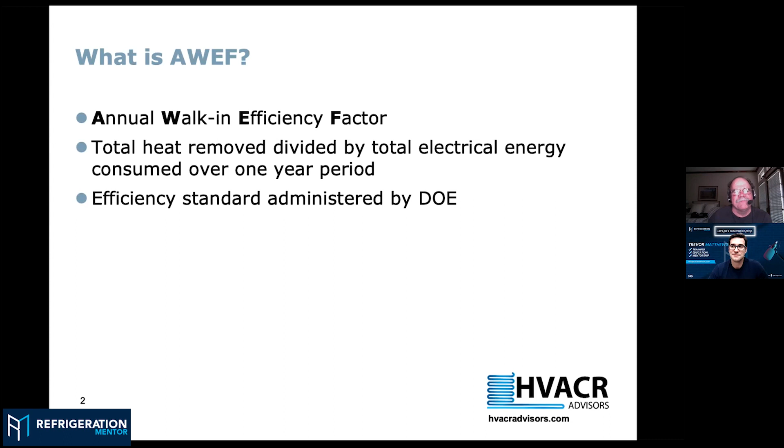And they got around to looking at walk-in cooler equipment systems fairly recently. They've been doing residential air conditioning heat pumps for quite some time, and they've established a standard for efficiency for these walk-in cooler and freezer equipment.

And just to kind of give you an idea of the history, the original procedure was published in 2014. It was supposed to go into effect in 2017, but there were problems with the test. Yeah, there was problems. In other words, the manufacturers said, "Hey, this doesn't make sense." So they got together, worked it out, and they had it figured out by 2020. So as of about 3 years ago, walk-in coolers and almost 3 years ago, walk-in freezers now have to comply with the AWEF requirements.

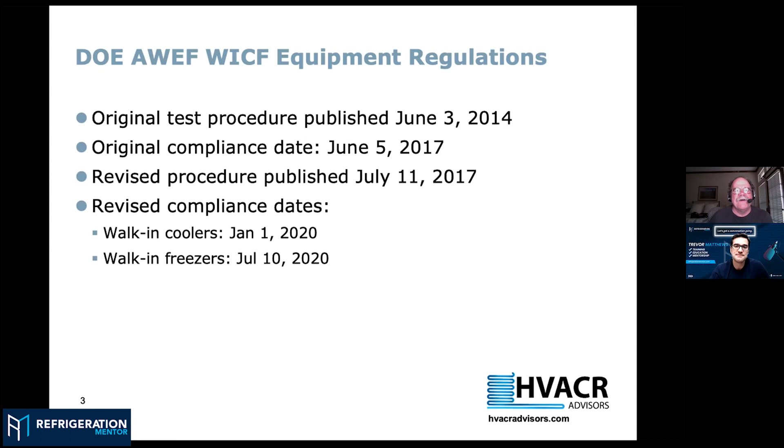Now, if you want to see the test procedure, it's available free online at the AHRI website. However, I might suggest to you that you go to my site under the cold topics section. You can read the article. I wrote an article, tried to make it as concise and as clear as possible what they're trying to do with the AWEF standard.

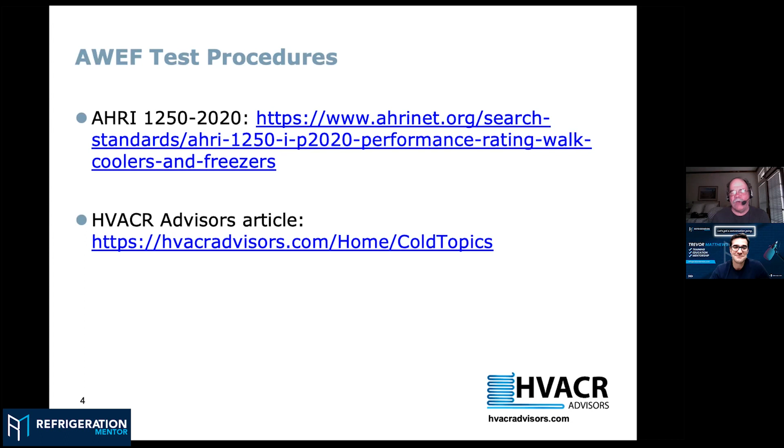Yeah, I've done a ton of training on them when I was working at Emerson, and it was hard just for me to figure it out. I had people walking me through it, and I was still confused for the longest time, because there was that period from 2015, 2016, I didn't have a clue, but around 2018, 2019, I finally was clicking in on it because there is a lot to it.

Yeah, in my article, I actually show this table. There are actual AWEF efficiencies. They are in BTUs per watt hour, which is the same for SEER, but obviously the tests are different. And they have an AWEF requirement for both indoor and outdoor condensing units, and they have a separate one for unit coolers. In the field, you're normally matching up a condensing unit with a unit cooler. Most of them are not sold as a system.

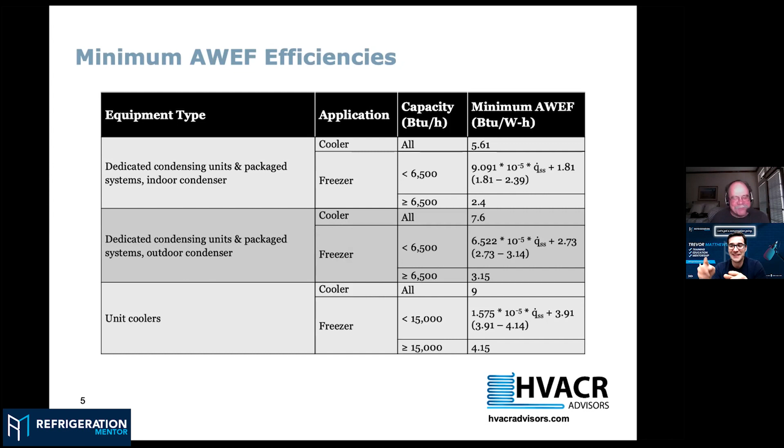So it was necessary, and that was one of the early problems, that the DOE had to figure out a way to rate just a condensing unit without a unit cooler, and they worked that out. That was a head scratcher. And the funny part is, when this was coming in, the refrigerant regulations were coming in at the same time. Oh, absolutely. It was kind of a double whammy, but I actually wasn't even planning on getting into that subject here.

We don't have to. But there are exceptions to the AWEF requirements. In other words, it is not necessary to install AWEF compliant equipment for certain systems. Any walk-in that has a floor space 3,000 square foot or greater, you're not required to put AWEF compliant equipment. The theory being that the DOE figured they're going to be engineered systems anyway. So they were only interested in the smaller walk-ins with their energy efficiencies.

Any compressor system with a remote condenser, there's no AWEF requirement at all. Water-cooled condensing units, no. Interestingly enough, if you've got specialized systems for medical or scientific applications, there's no AWEF requirements either. Any multiplex systems, like compressor racks that you would have on a supermarket system, AWEF doesn't even apply.

And they do allow in the compliance rules that if you do find a condensing unit or unit cooler that was manufactured prior to the compliance date, you can still use it. They didn't want wholesalers or manufacturers to necessarily scrap equipment. So you find an older piece of equipment, sure, you can use it.

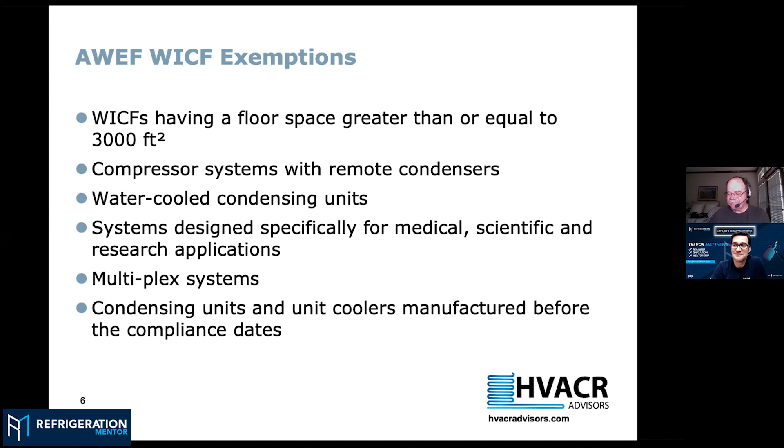So that generally brings up an interesting question: are retrofits exempt? Let's say you're working on a walk-in and you only want to replace the unit cooler, or you only want to replace the condensing unit. You don't want to replace the whole system. Are they exempt? The answer is no.

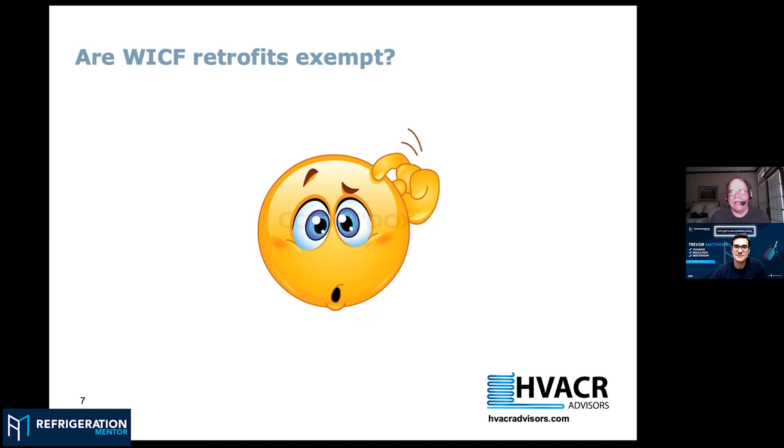If you have to replace a condensing unit on a walk-in that is required to have AWEF compliant equipment, you are expected to put AWEF compliant equipment in there. Retrofits don't exempt you. Yeah. And I know, talking to people about that, they're like, well, what do you mean? If I move it, I got to take out this good evaporator that's working totally fine? No, you don't have to take it out, but the condensing unit that you're replacing, yes, it has to be compliant.

Yeah. And then I know lots of people ask, well, what if I just change the compressor on it? Is that okay if I leave it? You know what I mean? Well, if you're changing the compressor anyway, like, yeah, how old's the equipment?

And the next question comes up, who's responsible for all this? Now, the equipment manufacturer is responsible for determining if their equipment is AWEF compliant. It is their responsibility. You get something from, like, Heatcraft saying this equipment is AWEF compliant, you're good to go. You don't have to do anything else.

However, it is the installer's responsibility for using AWEF compliant equipment when required. So if the installer finds some equipment that's not AWEF compliant and installs it when it should be AWEF compliant, they could be hung for that. So that's where you have to be cognizant.

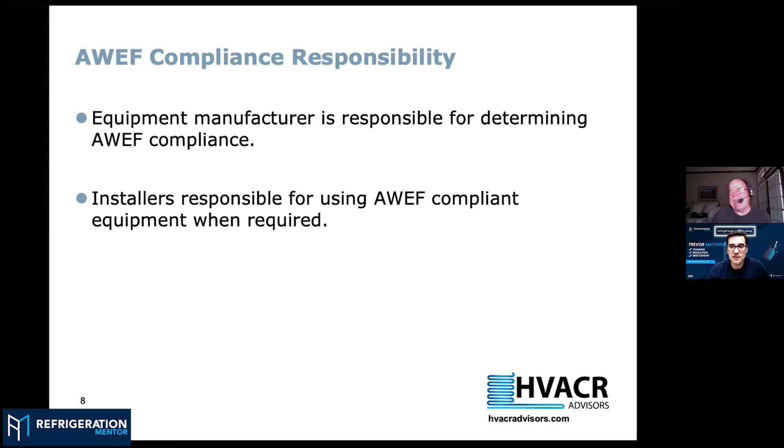Right. One other question that does come up: must you use AWEF compliant equipment in Canada? The answer is yes, because your group up there, Natural Resources Canada, NRCan, came on board with the DOE when they came out with the ruling. Yep. So it's all done now. So it's North America wide. Well, Canada and the US, anyway. Basically, yes.

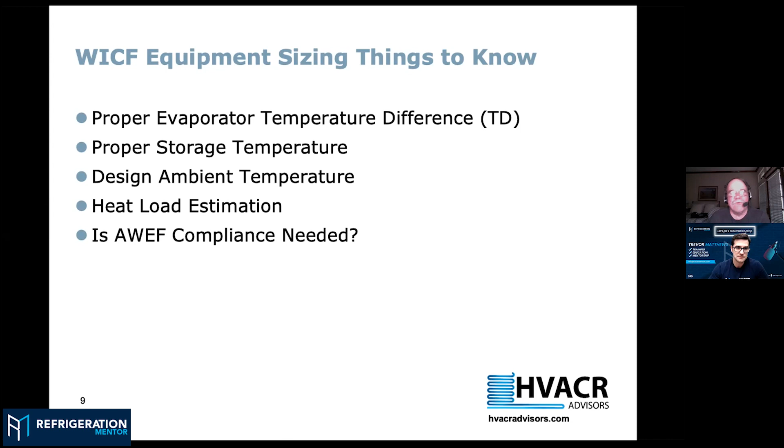All right, and then finally, what do you really need to know to size the equipment? Some of this should be basic to many of you, but you need to size the unit cooler for the proper temperature difference. You need to know the storage temperature. You need to know the design ambient temperature for the condensing unit. You need a heat load estimation. And obviously, you need to determine: does this particular walk-in need AWEF compliant equipment?

And just to make sure everybody's on the same page with evaporator temperature difference: that is defined as your entering air temperature into the evaporator minus the evaporating temperature, the refrigerant temperature in the evaporator. Do not confuse temperature difference with delta T, the temperature drop of the air. In this particular example, we have a TD of 35 minus 25, or 10 degrees, but only an air temperature drop of 35 to 30, or a 5-degree delta T. So knowledge of delta T is good, but for sizing purposes, you're only interested in TD.

And I have people that say TD is your SST and your leaving air temperature. No, nope. You'll see in manufacturers' equipment they'll say they want the discharge air temperature when they're using CDS valves. Well, yeah, in the case of a CDS valve, which controls discharge air temperature, that's a different control. But in the case of a unit cooler, TD is what you want to size the unit cooler with.

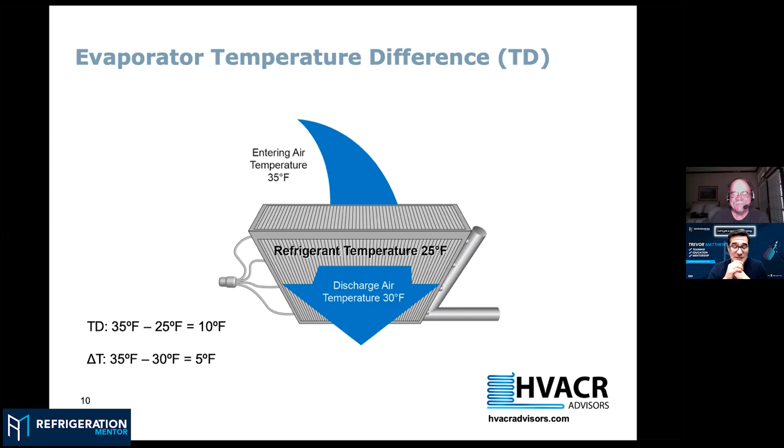The TD, and when you take a look at the unit cooler capacity charts, all of them use a 10-degree TD for rating purposes, which is fine because 10 degrees is about where you normally want to be anyway for most of your walk-ins. Now, if you happen to be just cooling beverages, you've got a beer cooler or whatever, you can run that up a little bit to like 15, or anything that's short-term packaged products.

Floral cases, they like keeping the TD even a little bit lower if possible, 8 degrees. And just for curiosity, if you happen to be doing wine rooms, they even like higher TDs up to 18. They don't want a real humid cooler in there. They don't want condensate anywhere on the nice wine bottles or whatever. But for the most part, you can use 10-degree TD for sizing unit coolers.

So why don't you talk about that a little bit, on the TD versus the relative humidity that that coil will cause in a box, because that's important. I don't think a lot of people talk about that. So yeah. And on this particular table, I did include the approximate range. Now, again, it's approximate, because you don't know the entering conditions of the air, but when you're operating at a 10-degree TD, you're typically 80 plus on the relative humidity in that walk-in, and that's fine for most of your applications.

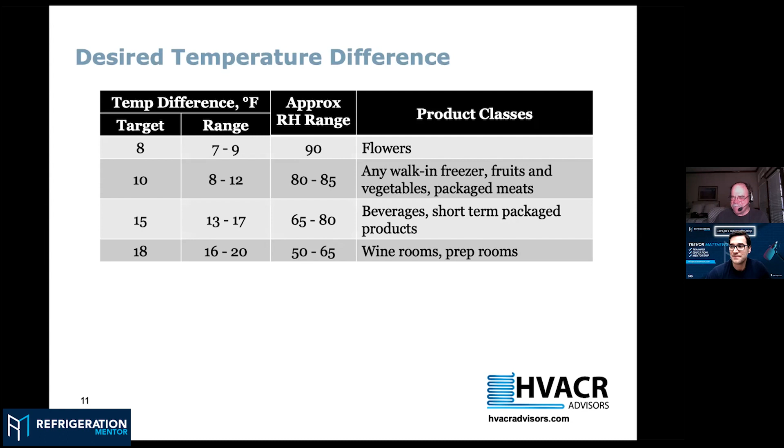And here's just a little table on temperatures. You can get real extensive on this, but for the most part this will work for most of your applications. Any cooler application, your storage temperature should be around 35, 37 degrees. Frozen foods, 0 works very well. I know some people like to see ice cream cases driven further down. Let's get it colder. Drop that suction. Well, personally, I've never seen the need even for ice cream to be at -10, but some people like it down there.

Man, I've seen so many racks that I go in and it just drives it down so cold. Like why? Why are you running everything so cold? Okay, good. All right.

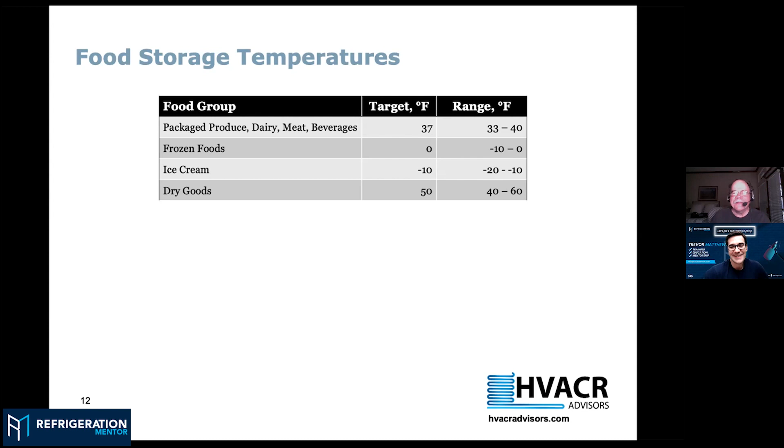But the other thing that you need to figure out is the design ambient temperature. What I did in this particular table is I identified the top 10 metropolitan areas in the United States and their associated weather stations, and this table shows you the design ambient temperature for those locations. This information is available from ASHRAE. The ASHRAE Fundamentals Handbook has a very extensive list of temperatures that you can look up. For example, in my area in Dallas, we have a nice high ambient temperature, 101.

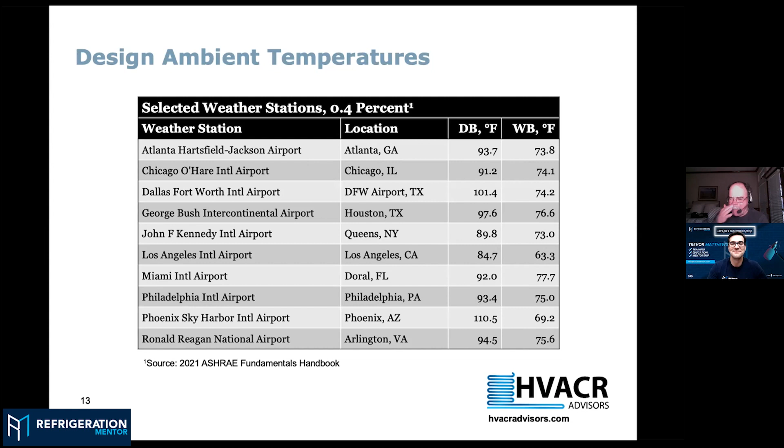You need to know this so that if you're sizing an outdoor condensing unit, you make sure that it has the capacity you want at the design ambient. Now, you'll note that on this table, I note the 0.4% ambient temperature. Now, what do I mean by 0.4%?

What that means is that on average, that's the total percentage of hours in a year that that temperature will be exceeded. So if you do the math, there are 8,760 hours in a standard non-leap year. And if you multiply that by 0.004, that comes out to 35 hours. So any of those temperatures that you saw in that chart, you can expect on average maybe 35 hours out of the year that those temperatures will be exceeded.

All right. Now, ASHRAE goes through the trouble of not only publishing the 0.4% temperatures, they publish the 1 and the 2, which are subsequently a little lower. And you may wonder, well, which ones should we use? Well, the folks on the TC committee that does the chapter on load calculations, they use 0.4. And I figured that I'm not any smarter than the guys on that technical committee, so my software uses 0.4, as I believe most of the other programs out there also do.

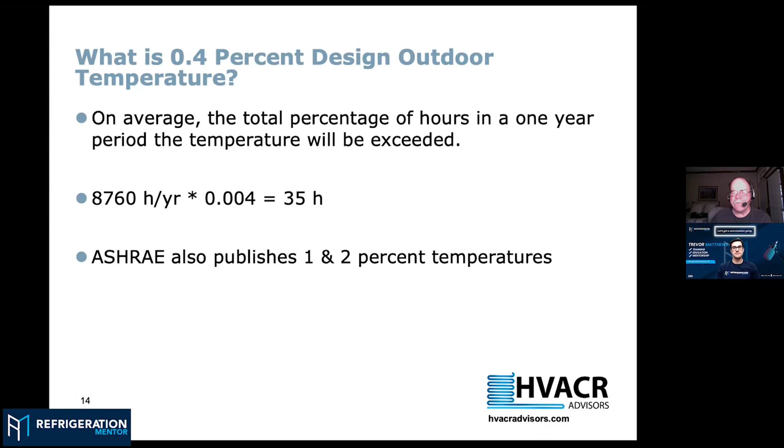And what I'm showing here, and I'm just picking on Heatcraft because I can. I've done very little business with Heatcraft, but they do publish some very nice tables. And the whole idea is in sizing equipment. Once you know your design ambient, the capacity you want, the TD you want, you can go to these tables and select a condensing unit and unit cooler. Unfortunately, in the case of Heatcraft, they only go down to 90-degree ambient, which they need to change someday.

Well, here in Canada, for years, I was going around and helping contractors drop it to 70 or 60. A lot of these units, right? Just 90, low condensing. You want to save some energy, you drop the condensing. I think in Toronto, for example, the 0.4 ambient is more like 88 or 89 degrees anyway.

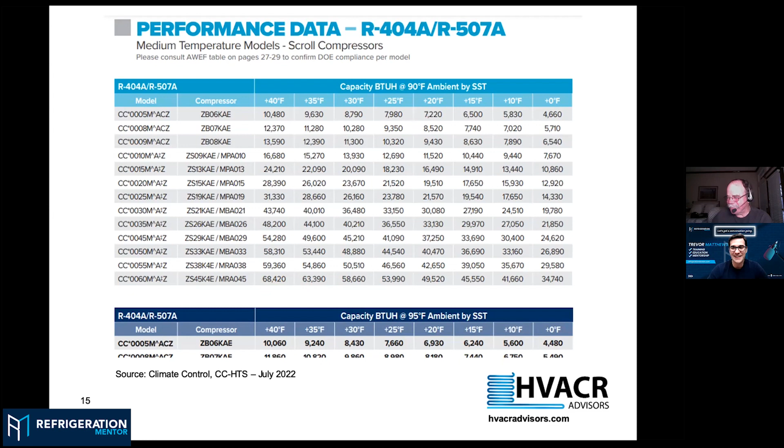Yeah. And obviously you can find nice tables where you can pick the unit cooler. And as I noted before, you'll see most of them will provide you the 10-degree TD automatically. If you want to size at a 15-degree TD, you'll have to bump it by a factor of 1.5. So those are kind of the slides that I wanted to show initially.

Yeah, because this is what most people see. If they go to a wholesaler, it doesn't matter if it's Heatcraft or KeepRite or whoever it is, they're going to have some sort of chart. Emerson has charts just exactly like this. When I was training on Emerson, it's exactly like this. And then a lot of manufacturers now use software.

Well, yeah, and that was my next point, that for teaching purposes, having a student go through these charts one or two or three times is, I think, a very good thing. Not 100 times, but two or three times. And that's exactly what we did at Tecumseh University. Here are the charts, size the equipment using these charts. Now, the math is obviously not difficult, but using the charts is cumbersome. And this is what a computer program is supposed to do for you. Yeah. As long as you understand the procedure, there is no reason to use these charts.

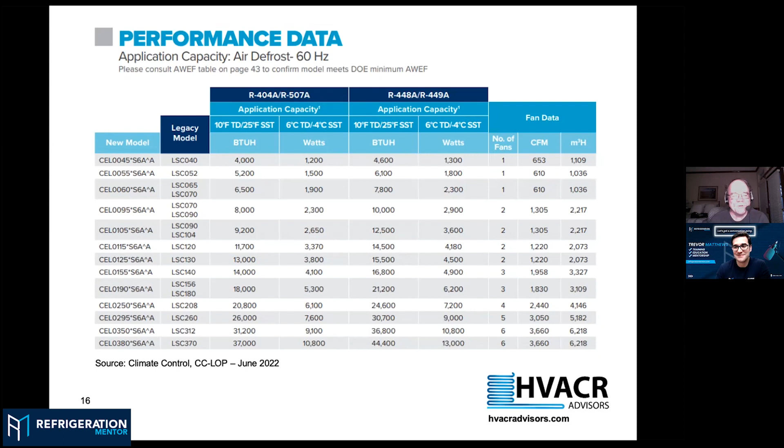Just before we get to that program, there's a question. What do you think about the difference in capacity for 404A and 448A? On the unit cooler side, the unit cooler folks have 448A as a higher capacity. Now, I don't completely understand how they came up with that, because when you look at the compressor software, it says something different.

Yeah, that's one of the things that I had elected to do, at least with my software, is that I am using the manufacturer's published performance data the way they've got it published. I said, all right, you guys are supposed to know as much as anybody about what this unit cooler and condensing unit have as far as capacity. I'm going to use it. So, but to your point,

I personally would expect in most operating envelopes for a condensing unit to have slightly more capacity on 448A than 404A. The drawback there is that 448A will run hotter. You'll run higher discharge temperatures. Right. So if you're employing some kind of a desuperheating valve to keep that in check, that's going to detract obviously from your capacity. Exactly.

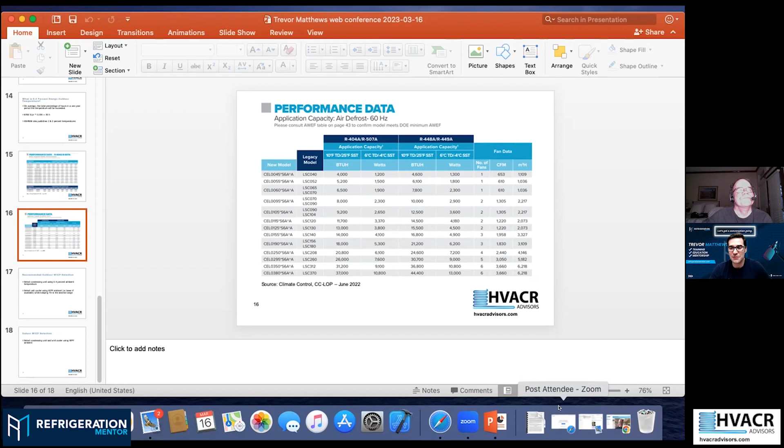And I've seen a ton of that, like in supermarkets, we're doing retrofits from 404 to 448, and it's like, why are all these compressors tripping off? Well, you need some demand cooling now, or liquid injection, or refrigerant injection. Yeah, okay, excellent.

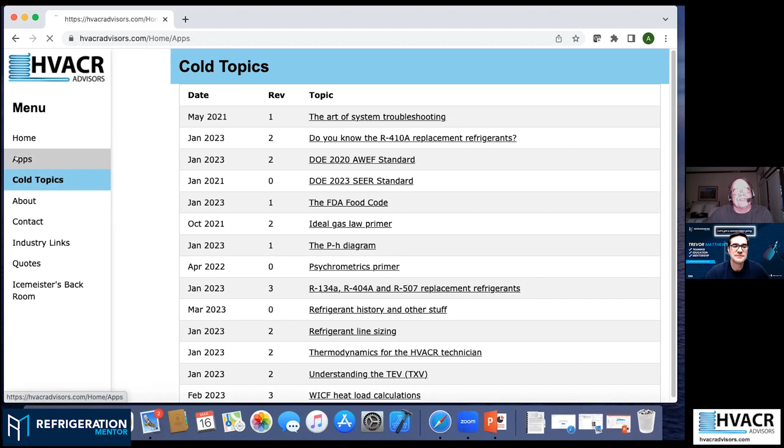And under the apps section, I've got a number of apps here. The walk-in cooler freezer equipment selection is the topic today. One thing to keep in mind is that these apps are mobile friendly. I wrote them myself, and I describe them as kind of mobile, somewhat friendly. So if you've got your iPhone or Android, you should have no trouble running these selections on your phone. So I'll just bring this thing up here.

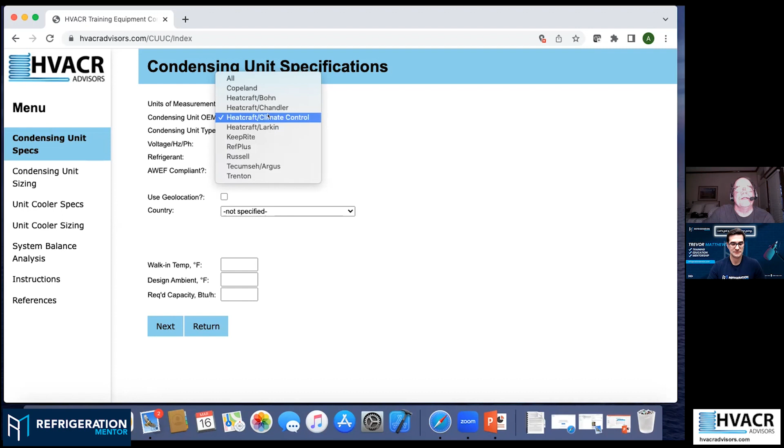As I pointed out, I've got all the main manufacturers here. You know, got KeepRite and RefPlus. RefPlus actually does a very nice job publishing data. Yeah. And what I'll do is just stick with Heatcraft here for a moment. And I got a choice of indoor or outdoor and the different voltages. And I'll leave them alone for the moment.

And here are the refrigerants that are available. AWEF compliant is checked by default because most of your applications will require it. But if you're interested in not having AWEF compliant equipment, you can uncheck it. It also gives you the option to include units that are no longer manufactured; you can click that if you want. But I'll just get this back up.

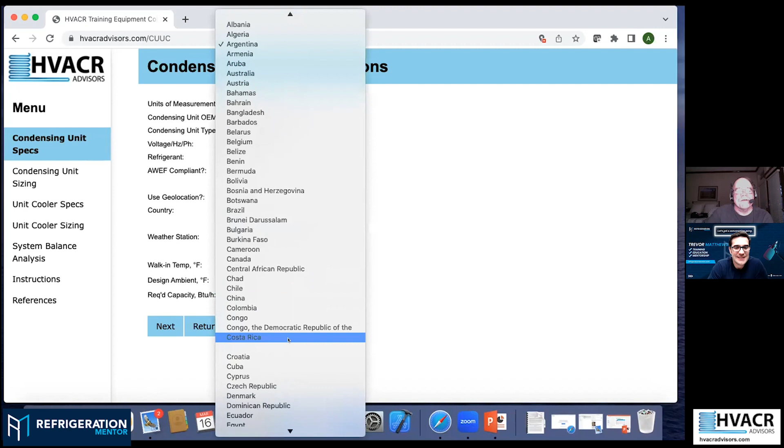Now, it has geolocation capability here. What I'm going to do is click that, and that's kind of funny. Since you're in Argentina right now? Yeah, well, it's because of our connection here. If you were on a regular connection... the heck with that. VPN. What I'm going to do, since I've got all these, this is data from ASHRAE, so I'm going to go to.

Let's see. Since I am going to be presenting at the HVAC Excellence Conference, which is being held in Las Vegas next week, I picked out Las Vegas and it filled in the design ambient. It's the 0.4% temperature. So it looked it up automatically so you don't have to bother with it.

And let's say we're interested in a cooler, and I'll just use 35. And let's say 7,000 BTUs, just to pick a number here. What you see here is the program nicely displays a chart, which I thought to myself, you know, nobody wants to look at numbers on a table. Take a look at a nice chart here. And what it's doing is retrieving the performance data from the Heatcraft Climate Control literature and displaying it in a nice graph.

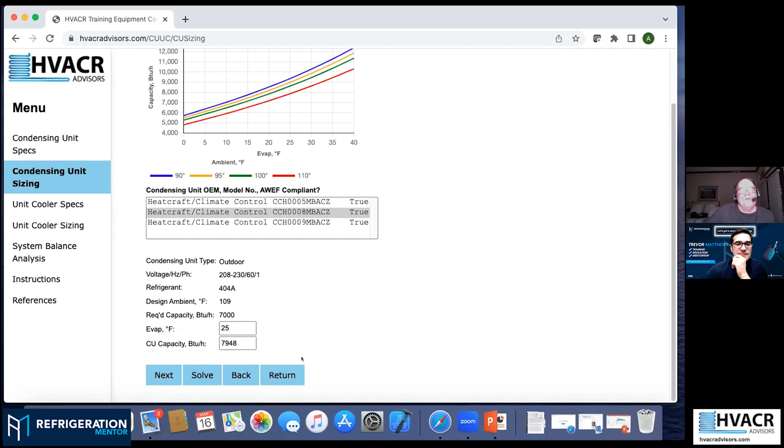So here's 7,900. So if I were interested in a little bit larger condensing unit, I can do that. 7,900, so yeah. Going from 6,300 to 7,900. Yeah, that's a big jump. And it automatically figures, I put 35 as the box temperature. It's going to use a 10-degree TD. If I want, I can change this. Change it to 15 or whatever, or drop this to 20 if I wanted a 15-degree TD. But I'm just going to leave it at 10.

And if I click next, it's going to assume that I want a Climate Control unit cooler. But if I really wanted to, I could pick any from this list. Let's just stick with that. Let's maybe go with the 115 volt. Stick with the low profile. We've got various models here. A lot of people like buying unit coolers with mounted components, so I can specify that. We'll leave AWEF on there. And if I wanted, I could put 2 or more unit coolers in there; for this small one, obviously the one's going to be fine.

So what you see here is some options. With the air defrost models, you only get one rating, so that's why you get this flat line. All right. And the calculated TD is 9.6, which looks pretty good. And I could change that to the next smaller one, which gives me a 12.2. And just for argument's sake, I'm going to pick this one. Let's say this is kind of a beer cooler type of thing. And I click next, and what you have is a system balance chart. It will actually figure out exactly where the unit cooler and the condensing unit balance. And as you can see right here, it balances right at 11.8 at this capacity.

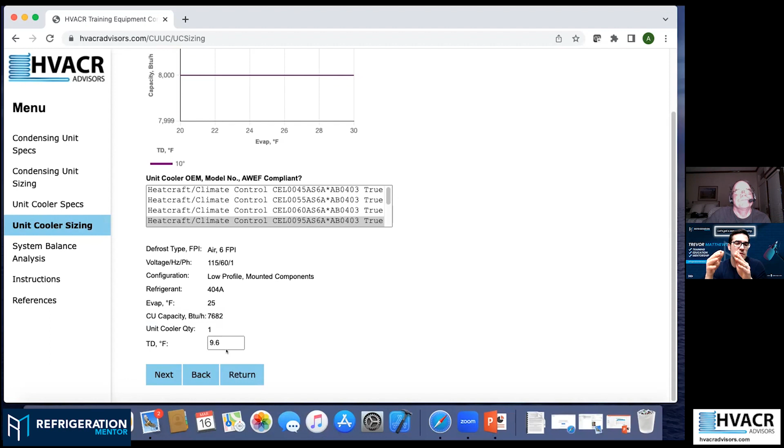So it took the condensing, which was 7,900. The one you picked was 7,950. Then you picked the evaporator, which was, I believe, 6,500. Yeah, I can just go back and check that. It was 8,000, and then when you match them together, it brings it to 7,600. Yes. And it happens to be an iterative calculation.

One of the interesting comments I got from a wholesaler in Texas who sells Russell equipment says, Andy, I use your software, and you're always about 1/10 of a degree TD different than the Russell equipment. And I told them the reason is that Russell software isn't doing the final iteration. It isn't putting everything together. When you change the TD, you change the condensing unit capacity. So it becomes an iterative calculation. It's not a big deal for a computer, but you may end up having the computer do this several hundred times before it finds the exact solution. So that's the reason.

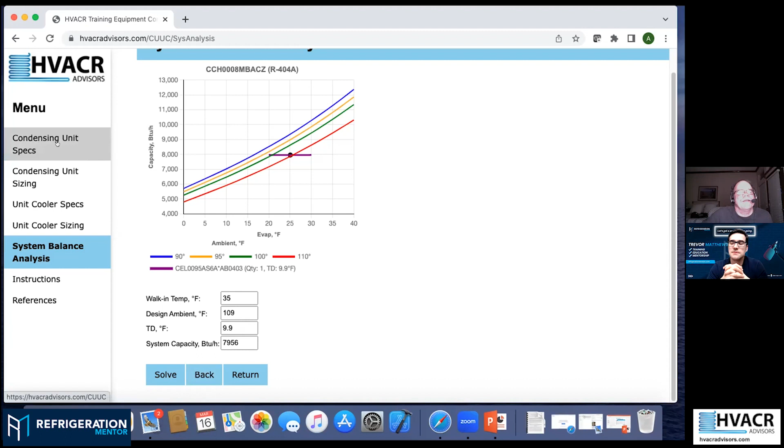Okay, so now you're looking for a 7,000 BTU walk-in box. In this example, you had the option of going with a 6,500 or 6,700 BTU condenser, or a 7,900 BTU, which is over 10% larger. Is there any way you could size it using the smaller condensing unit or not? Well, yeah, you can always go back. And there is a question too when you get that.

Does it give you runtime? That's another question in the chat. The runtime actually happens to be a load calculation problem. I have a separate program for that. Okay. So when we start here at required capacity, you're building in the runtime. Okay. So runtime's built into that. Okay, yeah, perfect. Yeah, absolutely. So that should answer that.

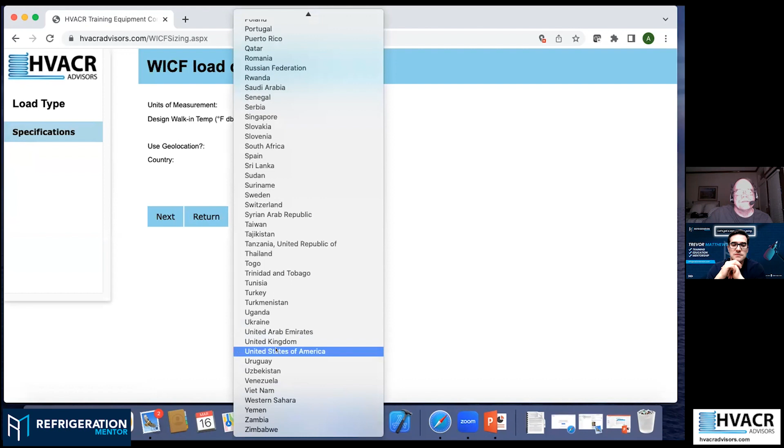Yep. In fact, one thing I'll do real quick, just show you. Here's a load calculator. This is where one would do a load calculation, and this would be a separate discussion all unto itself. All right, let me just show you the front part of this. Let's just leave it in Auburn for a moment. You've got the transmission, infiltration, product, and internal loads. You can step through it all. And then you've got the summary.

Here in the summary is where you adjust your runtime, your safety factor, and there's something called a diversity factor, which you can adjust to calculate the load. What does the diversity factor mean? I know the safety factor. Basically, the diversity factor, as ASHRAE defines it, is that when you do a transmission load, infiltration load, product load, and internal load, not all of those loads peak at the same time. Okay, that makes sense.

And what ASHRAE recommends is you use a diversity factor of 0.85. Basically, it uses only 85% of your total loads, because it's recognition that you're not getting all the peak loads at the same time. Yeah, totally makes sense. So you do your load calculation first before you start selecting your equipment. It looks pretty straightforward. I went through this once before, filled the box in to see what populates. Now we got that 7,000 BTUs, and we're sizing it. Yes. And it will remember within the session.

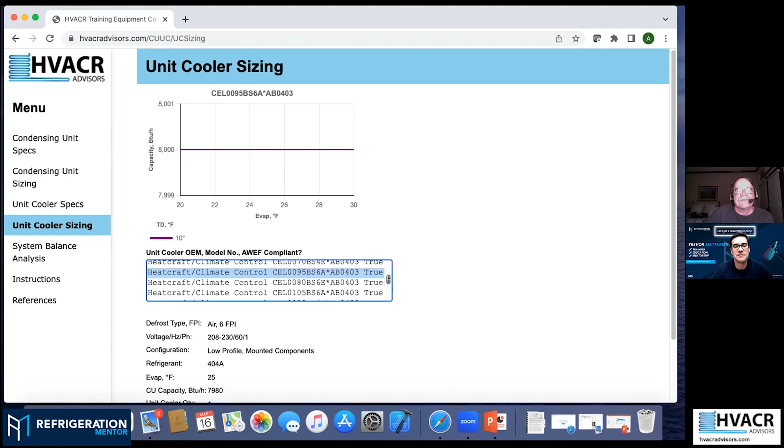So I recommend doing that all the time when you're sizing any type of equipment. You want to understand where your max is going to be, where your minimum is going to be, and just see what range it's going to be in. Yeah, that's exactly right. And that's really the point I was going to make in Las Vegas: it's fine to use the 0.4 ambient temperature for sizing the condensing unit. You want to make sure you're getting the capacity you want. But when it comes to sizing the unit cooler, use 90 degrees or less.

Now, the problem with using less than 90 degrees is that Heatcraft doesn't publish anything lower than 90 degrees. So if 90 degrees is the lowest they've got, you can put that in the program here, and it gives you the 90-degree capacity. Just for example, you only have about 6,800 at the 109, but at 90, you've got 8,000. All right. You really should be sizing your unit cooler at that capacity. Makes sense.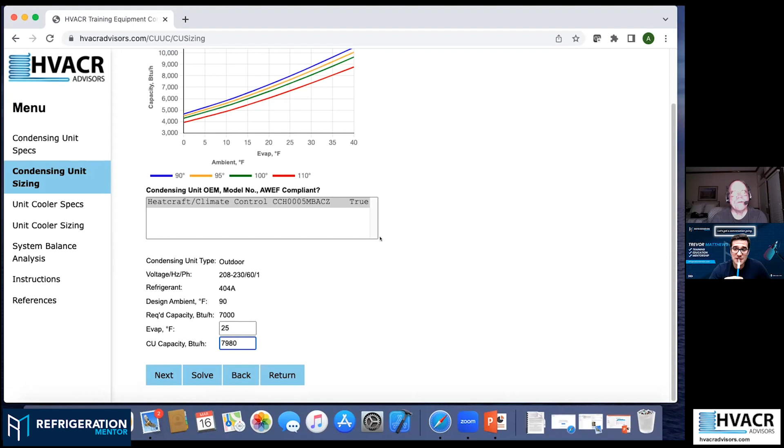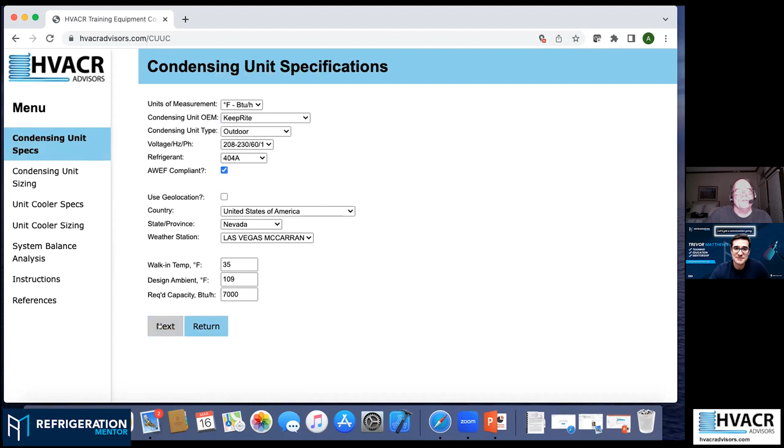Okay, well, I'm continually working on the system. It's really great that you have all the manufacturers in here. That's the game changer here, right? Yeah, you want to put a KeepRite on there, and you want to put, say, a Russell. There you go, and you just do a system balance. And by the way, I do like the fact that KeepRite provides an 85-degree ambient,

but they're used to the colder weather, right? Yeah. Well, it's spring now. Spring's here. Might be snowing outside right now. It was nice today.

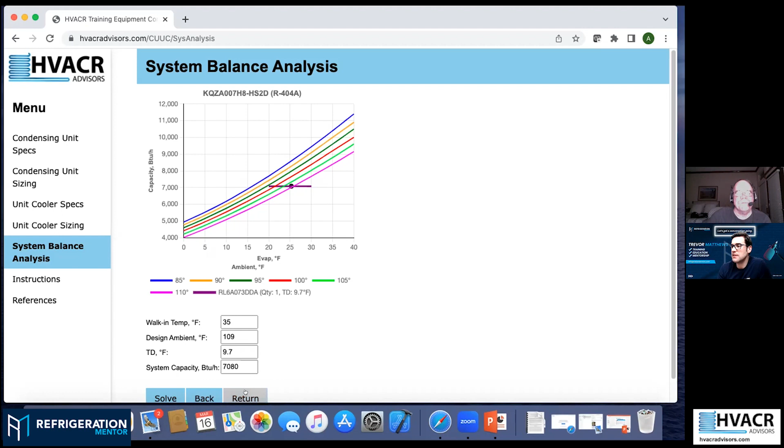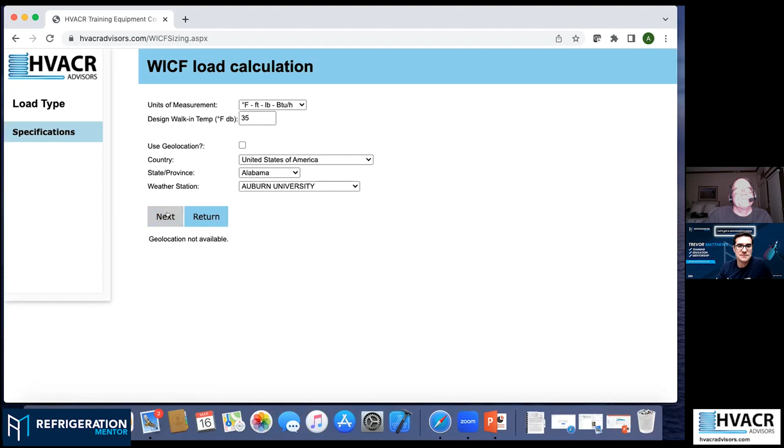We do have a question. I think it was about the load calculations when you had the diversity factor up there. They asked, so you don't use a 10% safety factor? Yeah, I think it was there. Let me just get back to it. Hold on here. It needs a location; this thing stops until it knows where you're at. The summary, yeah, there's 10%.

Now, the safety factor and the diversity factor work against each other. If you're adding 10%, actually, one of my wholesaler friends in Texas says, in Texas, we don't have a diversity factor. It's 100%. All loads hit maximum at the same time in Texas. So you can actually put 100%, which eliminates the diversity factor part of it. You can have the 10%, and your runtime, 18 hours per day, is pretty typical. But if you want to use a little bit smaller unit, you can go to 20. So any of these can be changed, and these are just factors that are applied to the total of your 4 different loads.

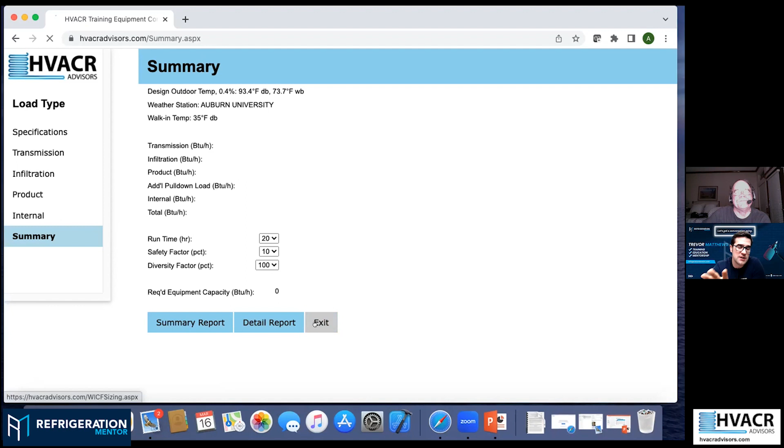Yeah. Awesome. So you need to get to this website and check it out. What is one of your favorite things about your website? Because you got a lot of cool things on here. I've been promoting and sharing this with a lot of people over the last year. What's your favorite thing on this website that you've done? Because you created a lot of this. Yep, I did it all. Icemeister's is a great resource for lots of different manuals in there.

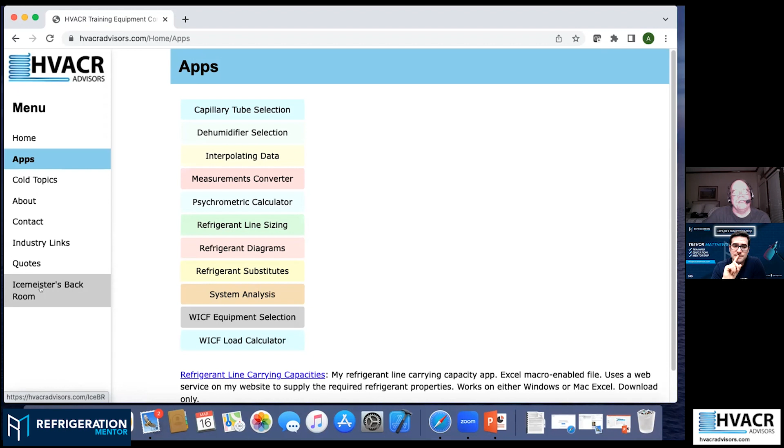Yeah, I do have to talk to you about Charlie, this one might be worth it. Definitely, I show this to so many people. Charlie Bartlett, he's been in the industry. Actually, he passed away a couple of years ago. But he had a website where he collected all sorts of manuals, old manuals, whatever. And I even have a Google search of this section of my site, and this is just a collection of everything that he did.

And I had two or three folks go through his site before, you know, they were concerned that it would go down because his wife still lives, but at the moment she still leaves that server on. But I just kind of gathered everything off of his site and put it on my site here. And there's hundreds of documents, countless manuals that I've searched and found there.

And one of them's the piping guide by Garth Denison. That one's on there. That's where I actually found this website, because of that, right? Because I always recommend for anybody in refrigeration to understand the piping, the engineering of a system. That's how you get better as a technician out there, understanding the engineering of it. Exactly. And I always promote lots of stuff like that.

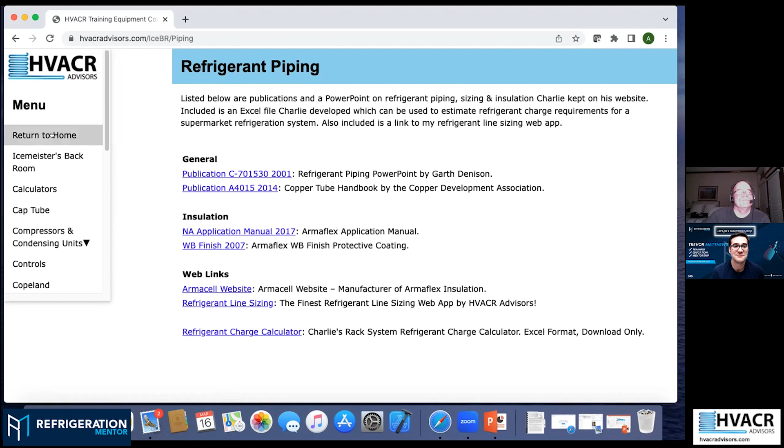But yeah, anyone who has really old manuals, they can actually upload those or send them to me. I'll just stick them out there. Awesome. I know a few people that collect manuals for the last 10 or 15 years, because sometimes even on Google it's hard to find them. And then manufacturers delete them. They'll pull them off websites and then they're gone. And you need this one manual. I couldn't believe it when some of the manuals I've seen just go away just like that. I'm like, they were all here. Now they're all gone. Where do I find this information now?

So Andy, thank you so much for taking the time to show us a little bit about what your website does, all the different apps. You guys got to get into this and check it out because there's a lot of different things in there that can help you, from engineering stuff to technical stuff. Any final words, Andy? No, I appreciate the opportunity to show this, and I still keep reasonably busy in the industry, and this is something I enjoy doing. So send me an email sometime if you have an idea for an app or an article or whatever.